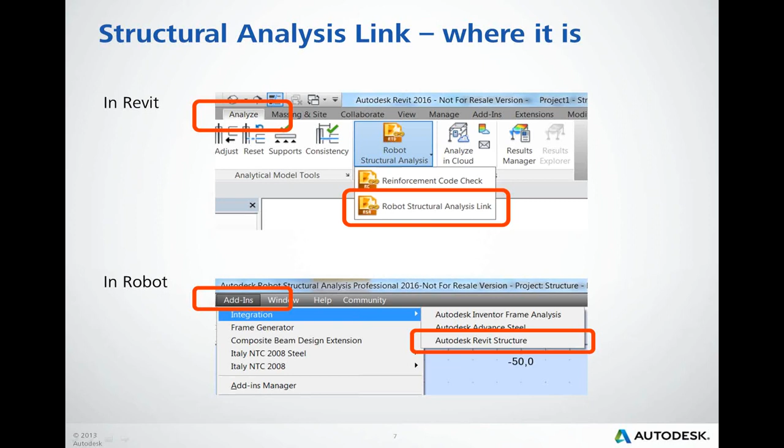There are two methods of model transfer between products. First, direct integration. The link connects both of these programs installed on one computer to exchange the data. That's why it's required to have both of them installed on one computer. Second, by intermediate file. An additional SMXX file is created so the file can be exchanged between users and computers.

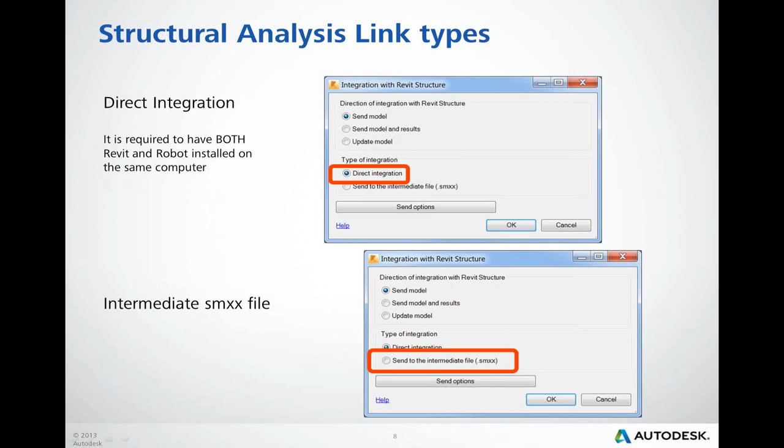Structural analysis link, understanding of the windows. Please select options from the perspective of the program you are currently working in. In general, export means send, and import updates means update in these windows. So, for example, importing a model to Revit is the same action as sending the model from Robot.

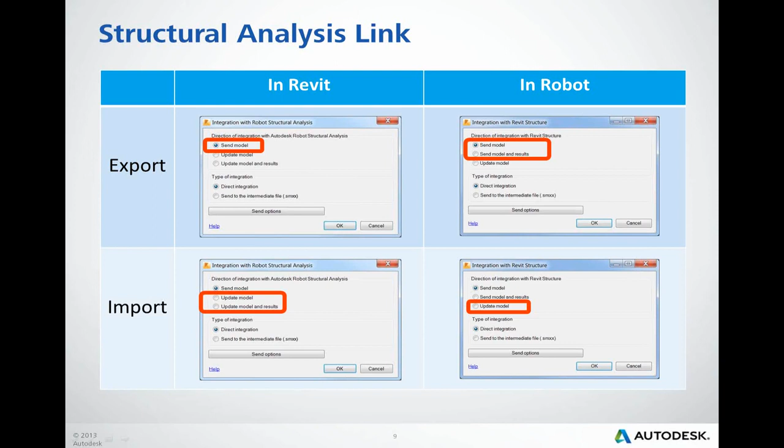Let's look at object transfer between Revit and Robot. Robot is much simpler, it contains only analytical elements, and a Revit model may contain objects from different disciplines such as architecture, structure, MEP, and so on. So let's look at Revit objects. Revit elements which can be exported, created during import from Robot, or updated from Robot are available as structural elements. But additionally, these elements need to have the analytical model enabled. By default, it is enabled for all of them.

Boundary conditions are understood as supports, such as point or nodal support, line, and area support, which can be applied directly to Revit analytical elements. In Revit, they are available in the Analyze tab or during analytical model adjustment, such as analytical nodes and analytical links.

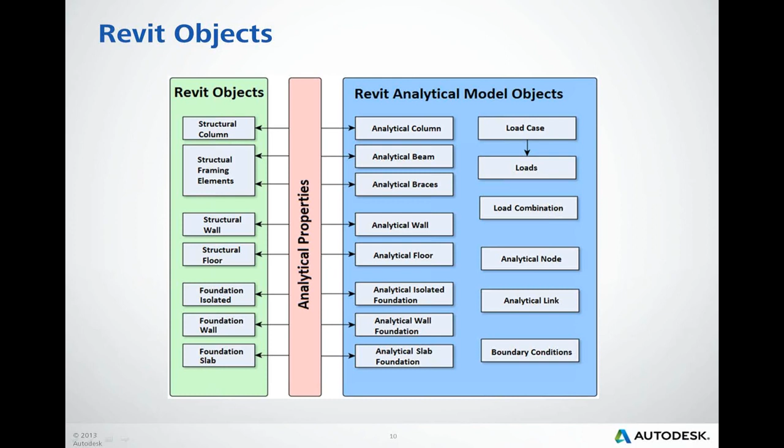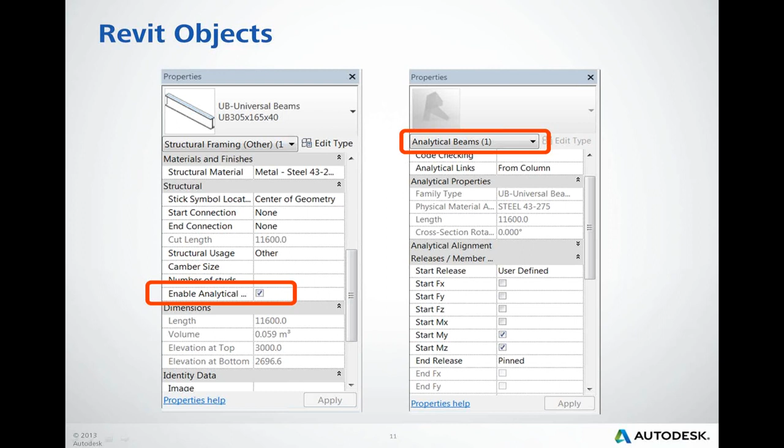The whole analytical model, or a level, section, or elevation view with analytical elements, can be displayed either using predefined analytical views in the structural template or by turning on analytical model categories in the Visibility Graphics window.

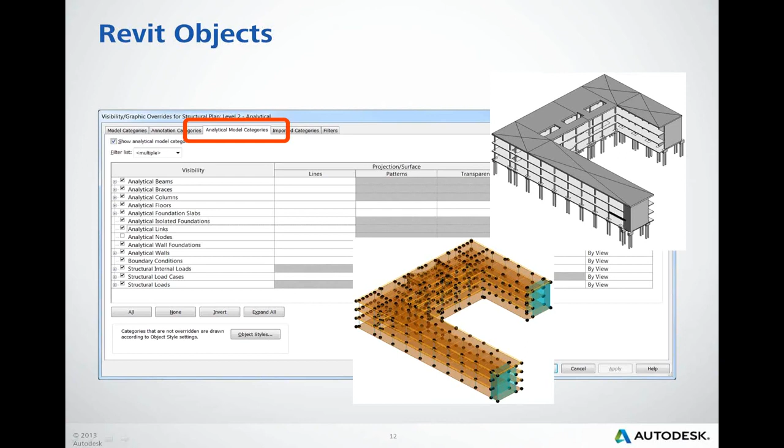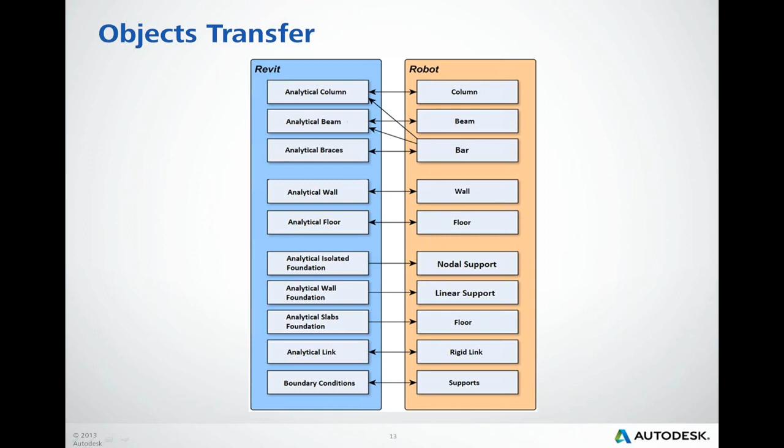On this slide, you can see how objects are transferred between Revit and Robot. Some of these transfers are unidirectional, some bidirectional. Especially look at the bottom part of this picture. Supports modeled in Revit as physical objects are exported only to Robot. Robot supports are transferred as analytical boundary conditions in Revit.

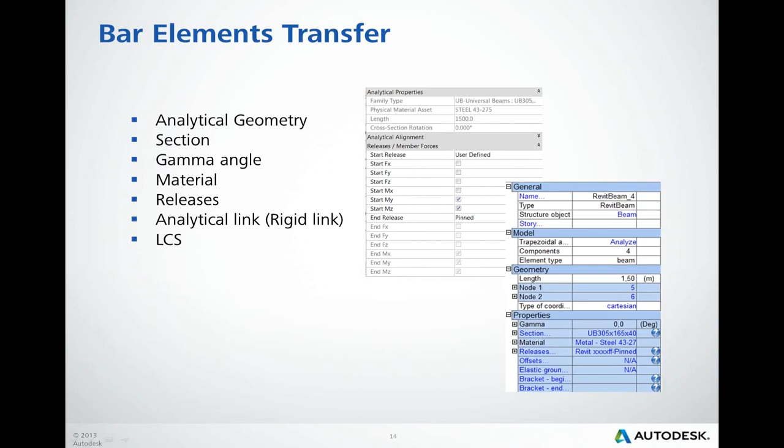Here we can see the list of bar properties exchanged between programs. They are geometry, section, rotation angle, material, releases, rigid links, and the local coordinate system of bars. And now a list of the wall, slab, or floor properties exchanged between the programs, such as geometry, thickness, material, and local coordinate system.

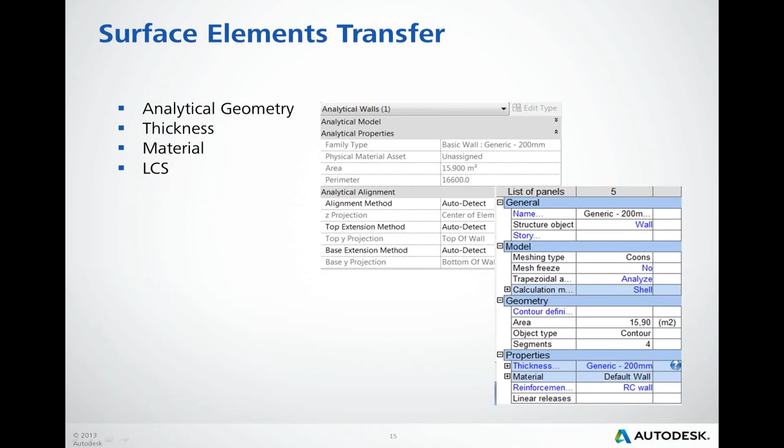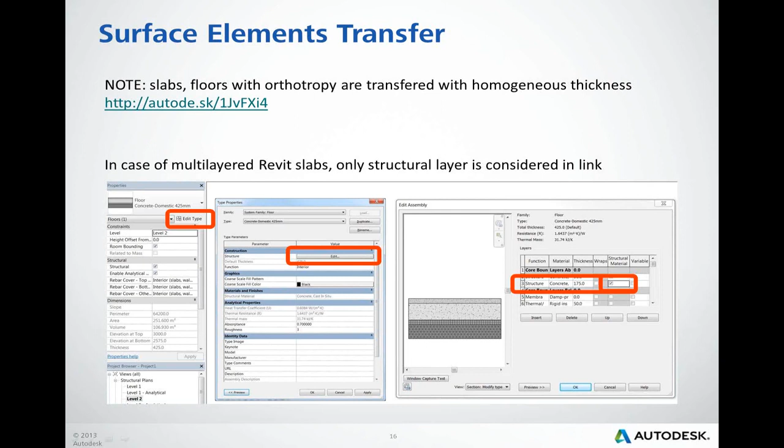The case of Revit materials. Structural analytical Revit objects should have materials with physical assets assigned for calculation purposes.

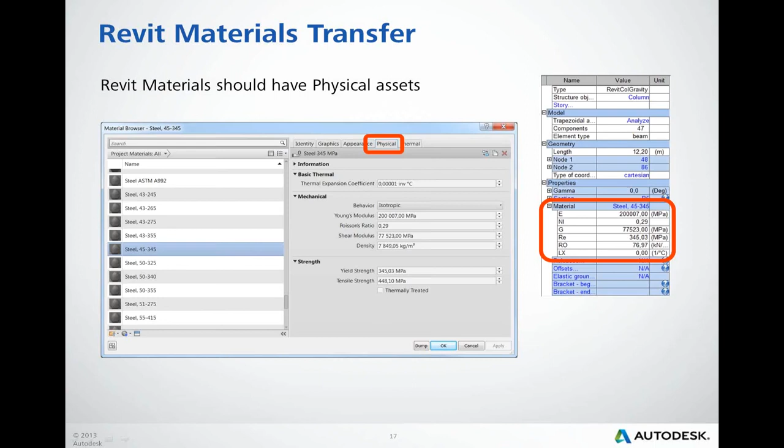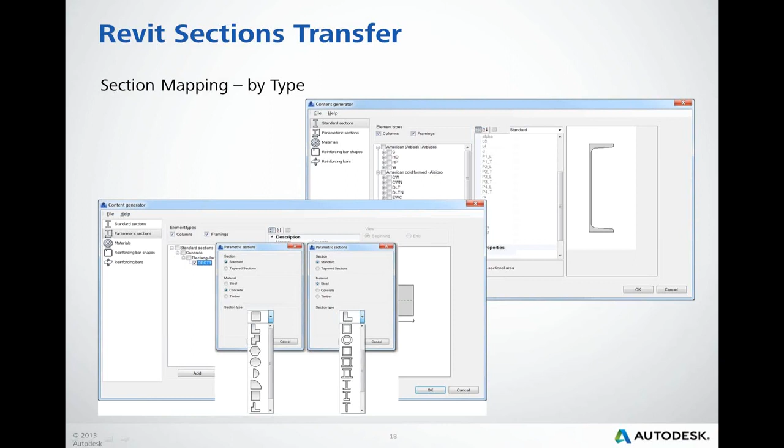Sections. Section shapes can be transferred between Robot and Revit in three ways. First, by type mapping. Standard sections such as steel database sections, Revit standard steel sections, typical concrete sections, and Robot parametric steel sections are automatically mapped to the correct corresponding section in the target program by the Content Generator module. Of course, this process is automatic and not visible to the user.

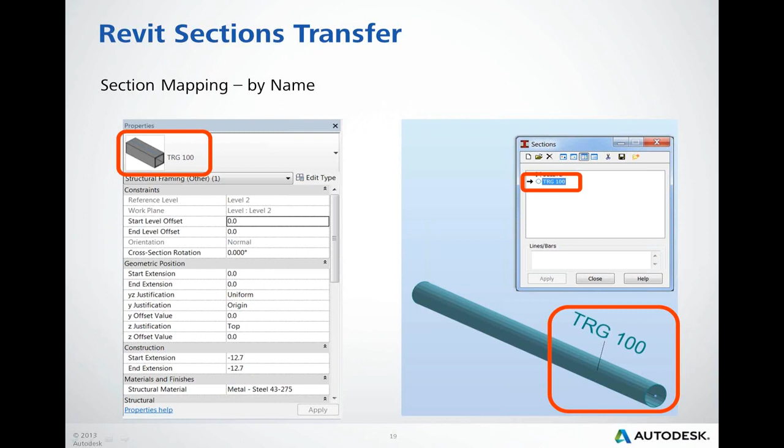If the name is not recognized, the mapping dialog window is opened, and it is possible to assign a section that does not match by name by selecting any available section on the list and in the databases.

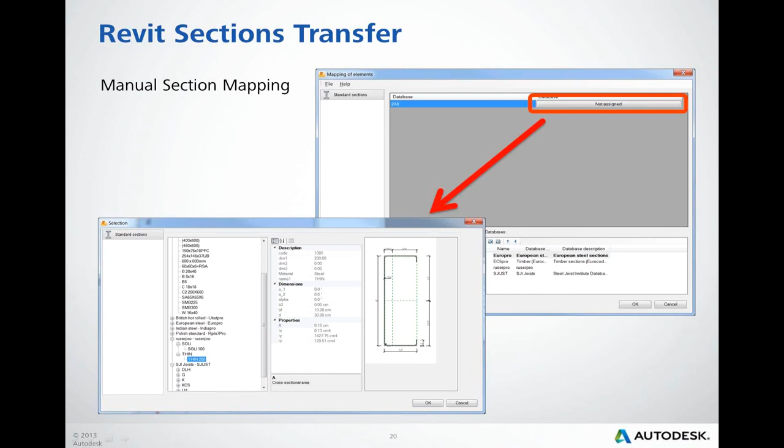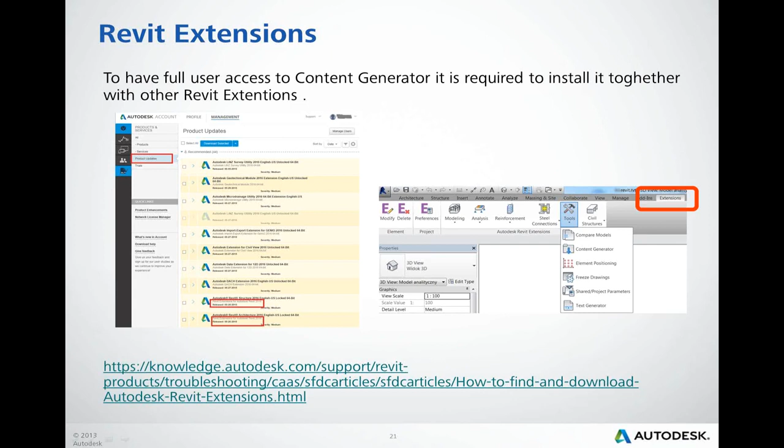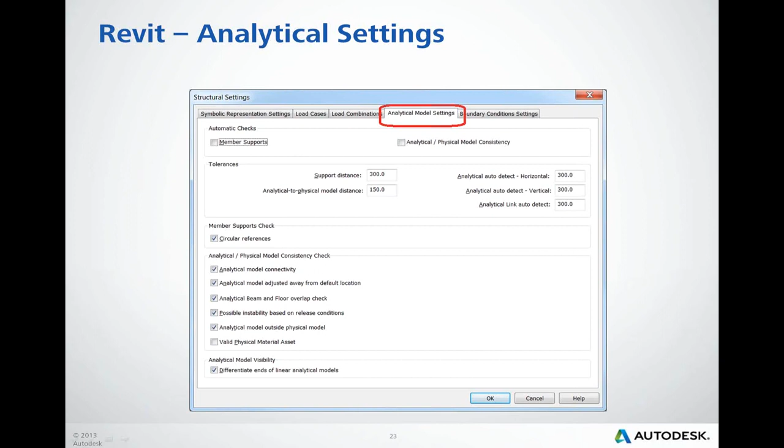There are some analytical model settings in structural settings for automatic adjustment of the analytical model. As you may see, there are some tolerance values, distances between objects, to be merged locally or located correctly in an automatic way. The Revit analytical model can be checked by consistency check. The button is located on the Analyze tab. The report of this check is displayed automatically right after the check or at any time from the Manage tab and the Warnings button.

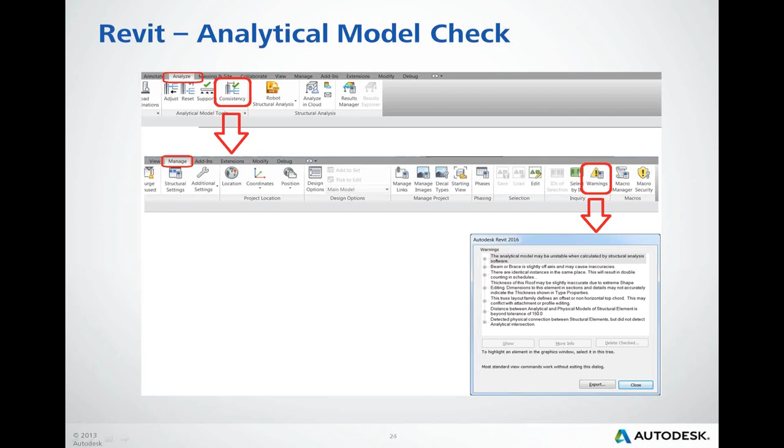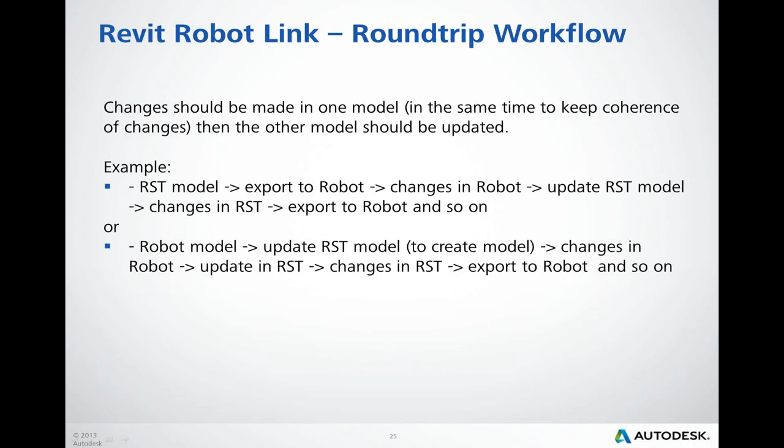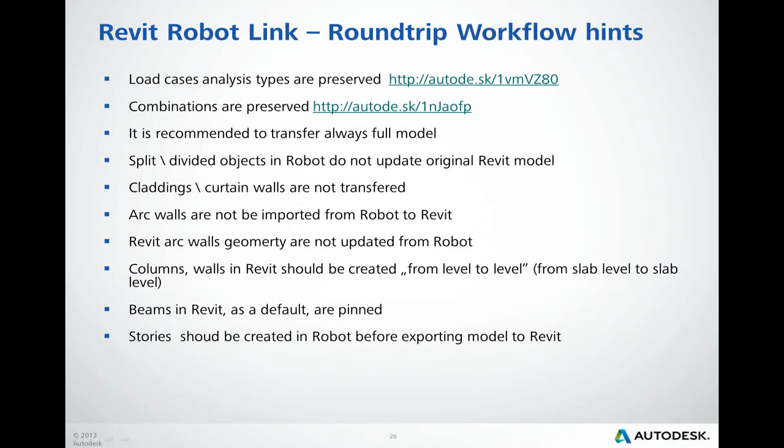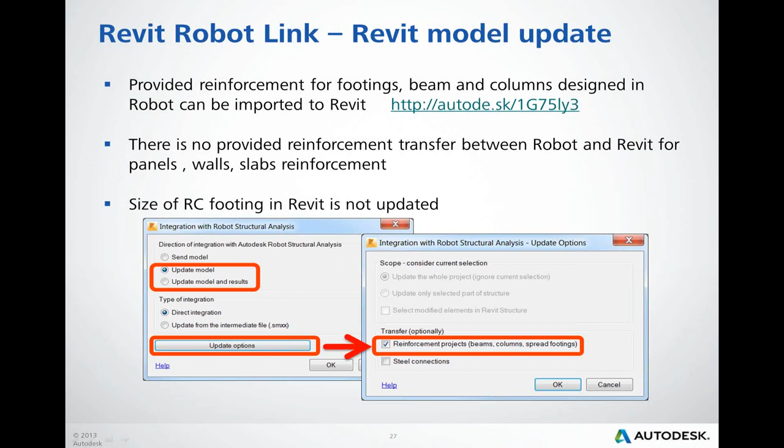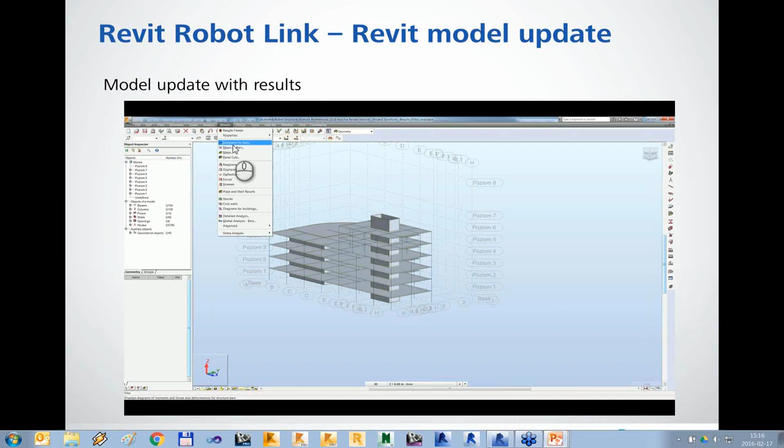Let's look at the example of how to update the Revit model. So as you may see, here we have a Robot model with results calculated. Just for viewing purposes, I will display the MY diagram for bars like that. And this model later on we will import to the corresponding Revit model.

As you may see, on the integration dialog window, I have selected Update Model with Results. On this window, you may see that the program creates packages of the results. On the top part of this window, there is a package name and package set for the finite element results. At the bottom, in case of having required reinforcement results, there will be an additional package for reinforcement results created. In this case, we have only one package for finite element calculations.

So after pressing, the program imports and updates the model with results.

We can manage results using the button called Results Manager, and after opening the window we will see the list of packages. After pressing Explore on this window, or Results Explorer on the ribbon, we can enter the window where we select properties of results to be displayed on the Revit analytical model.

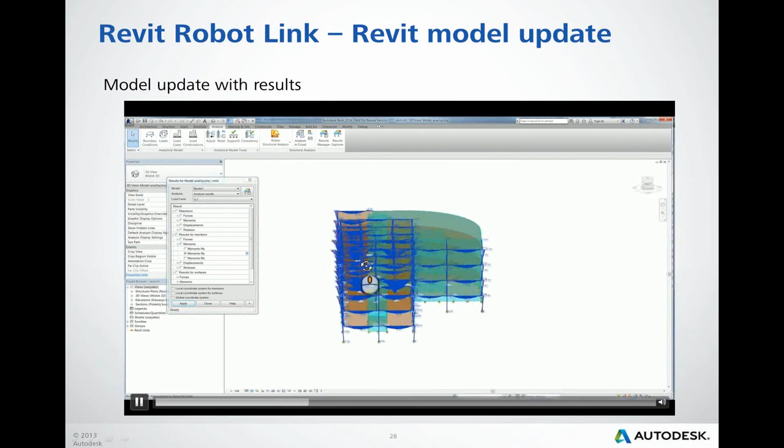We can switch to a different load case. So the same diagram for load case number 1. Additionally, we can display deformation.

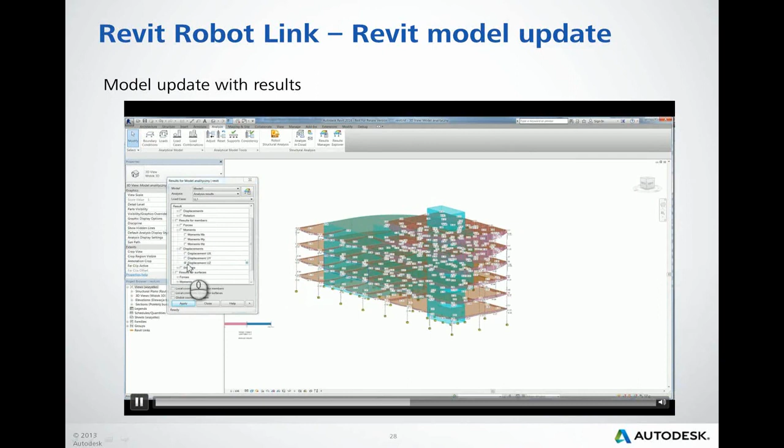Also there is a feature not available in Robot: displacement, which is the deformation in only one direction. So we can see the diagram of deformation in one selected direction.

For slabs, floors, and walls, we can display results maps.

Let's go back to Robot and calculate provided reinforcement. First, we will calculate provided reinforcement for all beams and columns. As you may see in the required reinforcement table, all results are available.

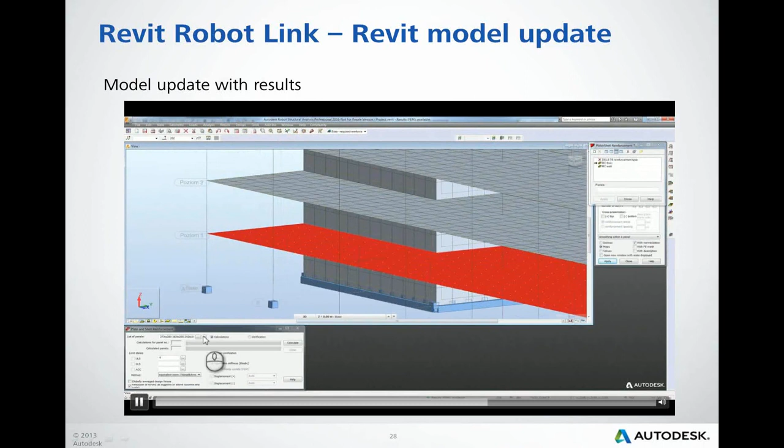Then, just for demo purposes, we will calculate reinforcement for just one slab. After calculations, we can see the map of the reinforcement.

Going to the link once again, we will select updating with results. Now, as you may see, an additional package for required reinforcement is activated, so the program will import this calculated reinforcement from Robot.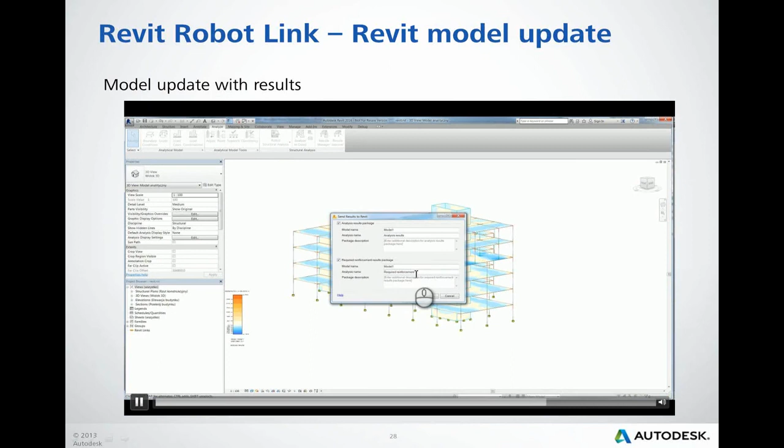As usual, we will go to Results Manager, and as you can see, there are two additional packages imported from Robot: the second run of finite element results, and additionally the package for required reinforcement.

So I will select the required reinforcement package now and explore these results. As you may see on this Results Explorer window, the tree of results is different because we selected a different type of package results, so it's only for required reinforcement.

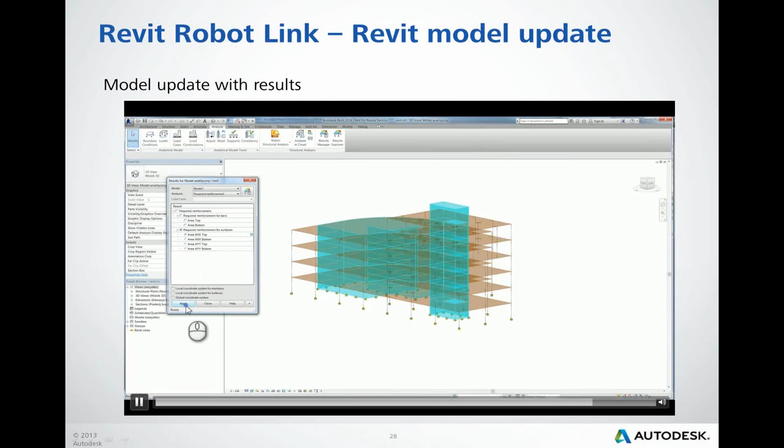After expanding the trees, we can see what we can present: top and bottom maps for slab reinforcement and wall reinforcement. Of course, results are only presented for the one slab we calculated in Robot.

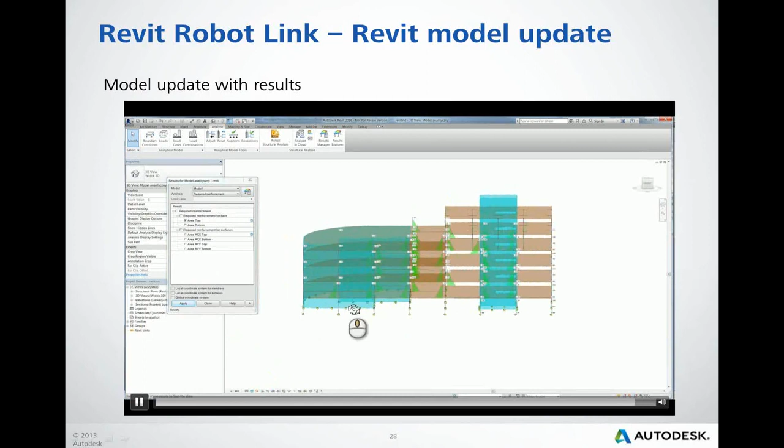And required reinforcement, top required reinforcement results for beams and columns can be presented as diagrams.

Now a few slides on typical Revit analytical model errors. Paying less attention to the analytical model and its accuracy may result in situations like this: beams, bars, and columns not connected to each other. Similar things happen with walls.

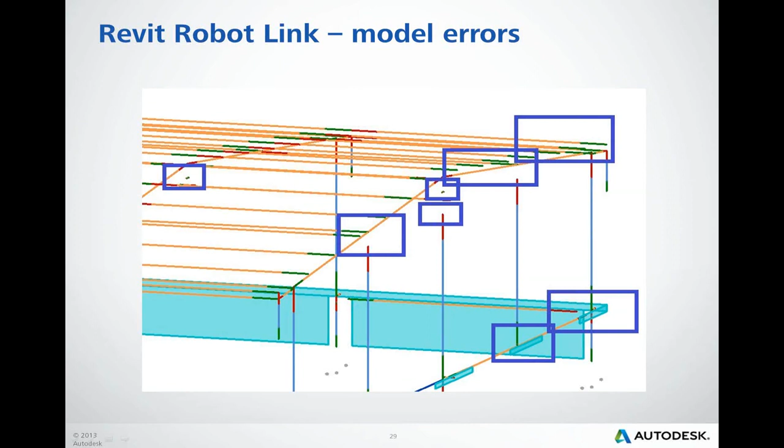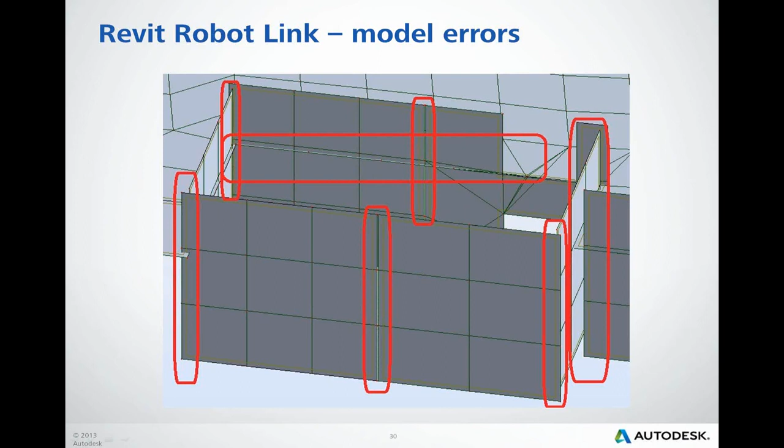Accuracy of Revit walls in Robot, as you may see, walls and slab analytical edges are not lying in the correct planes, so they are crossing other walls rather than meeting them in the proper plane.

Overlapping analytical slab edges, as seen in Robot.

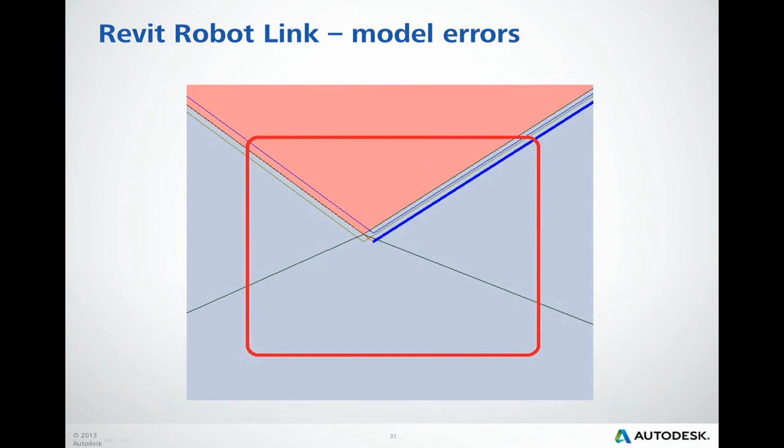For a Robot user, it's quite easy to correct the model. Sometimes it's time consuming, but there are many tools in Robot to do so. In Revit, though, let's look at a few examples of how to correct a Revit analytical model.

First, let's look at correcting walls and columns. As mentioned before, under structural settings there are analytical model settings with tolerances, and these tolerance sizes are understood as the distance between objects, analytical points or lines, to merge them into one and correctly link between objects.

In our case, I will change these values to a smaller one to disjoin this model, which is in the background. But of course, this automatic way may not always work.

That's why I want to show you typical ways of correcting the model. As you may see, these columns are not properly connected. To fix this, after activating the analytical model, we click adjust analytical model.

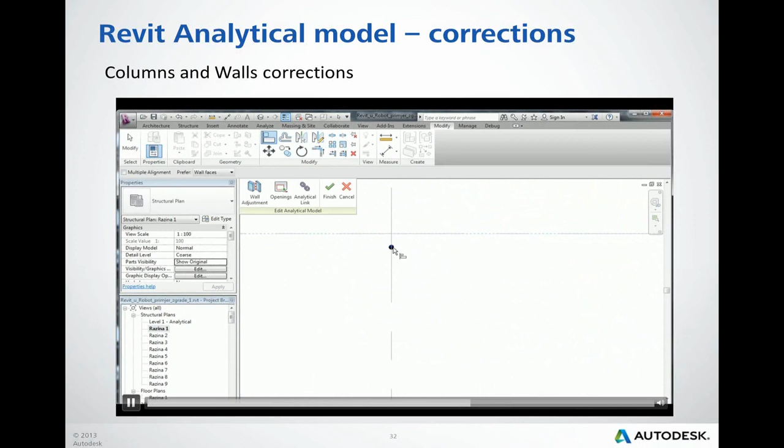In 3D, we can see the column is disjoint, so I will join it using the align method. And now, as you can see, this column became vertical.

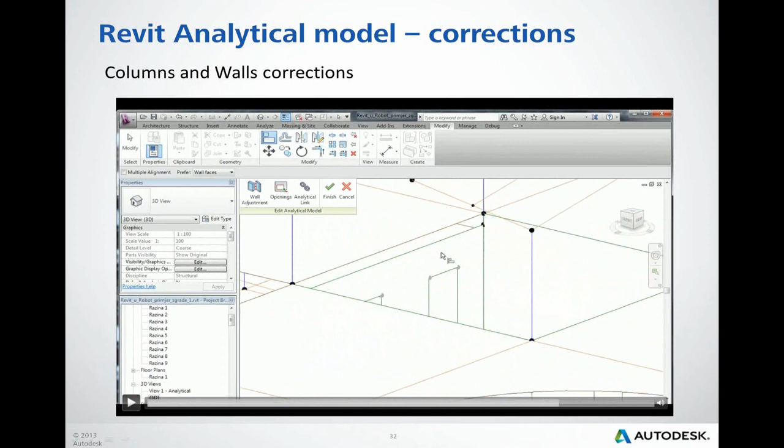Correcting walls: as you may see, this wall is too short. I mean, the analytical representation of this wall is too short. How to correct it? As you may see on the screen, the analytical nodes of the walls are usually presented in gray color, meaning it's not possible to easily move or relocate them, or use the align option on these particular corners or nodes. So for correcting walls, we either have to use the wall adjustment function.

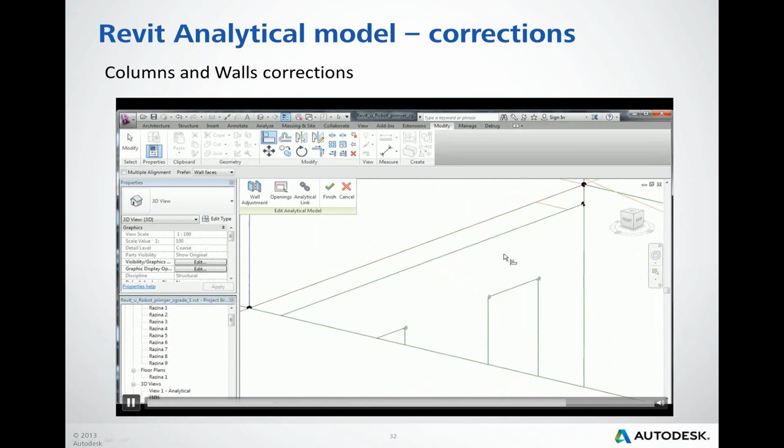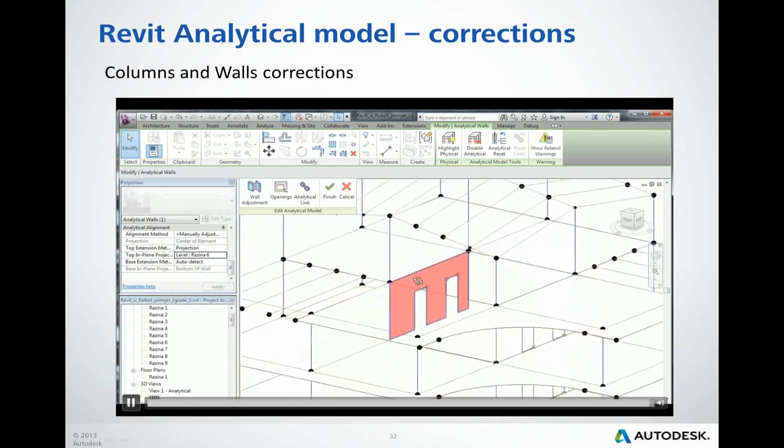This function is shown as a button on the Edit Analytical Model, or we have to use different kinds of projections to properly move the edges of the wall or planes of the analytical wall. Because align does not work here, after selecting the analytical wall we have to go to the properties window, the Revit properties window, and in the analytical alignment section, turn off auto-detect for different kinds of adjustments. Then select, for example, projection, and select the correct level or reference plane, and the wall will be properly adjusted.

Now you can see a simple model with a slab and an opening. How to manage that? From the 3D representation of this model, everything seems to be fine.

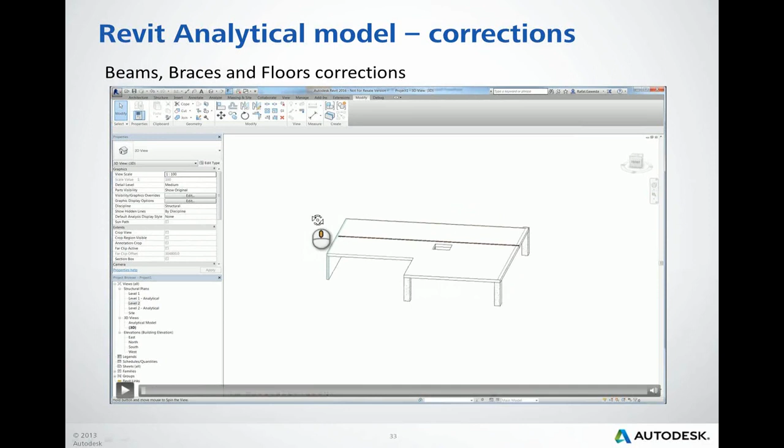Editing the boundary of the slab also allows us to change the slab opening geometry. The real opening geometry also forces the program to change the analytical model opening geometry. So after switching off the model display and turning on the analytical model display, we can see the view of our analytical model. As you may see, the opening is adjusted to the boundary lines created by the real slab floor object.

Of course, there are some errors made on this model on purpose for our demo. For example, the analytical edges of the slab are out of the correct lines or faces in Revit. To adjust it, we have to highlight or select the analytical model and go to adjust. As usual, we will use the align option to align edges to lines, grid lines, or other reference planes. Here is the way of correcting the position of analytical nodes.

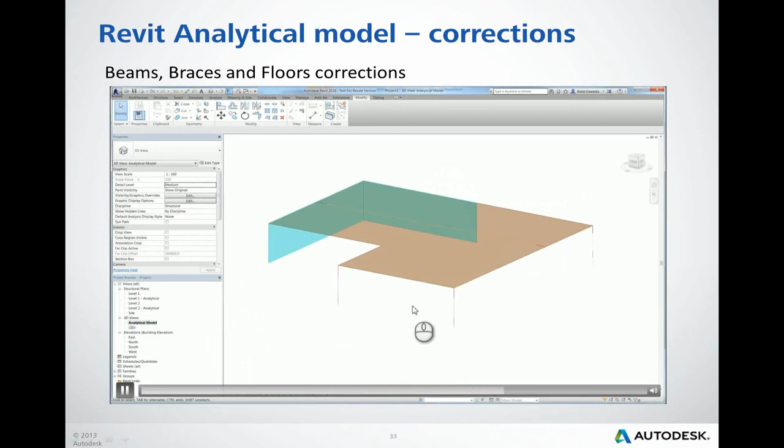As shown previously, the geometry of the opening is taken into account from the boundary conditions, the boundary lines of the real slab geometry, but disabling or enabling can be activated in the analytical adjust. As you may see now, the opening is disabled in analytical mode, but we can still see it in the real model.

Once again, adjustment of the boundaries, boundary lines or boundary points of the slabs. As mentioned before, clicking on the analytical node, the black dot, lets us freely move it. The same applies to the midpoint of every edge.

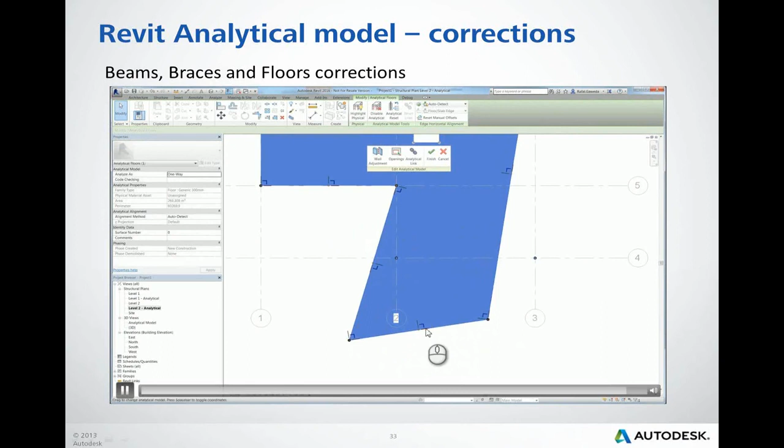Now, clicking on one direction axis, in this case the perpendicular axis to this indicated edge, allows us to move only along this selected direction. Now I will click on the second direction, and it only allows me to move the whole edge in that direction.

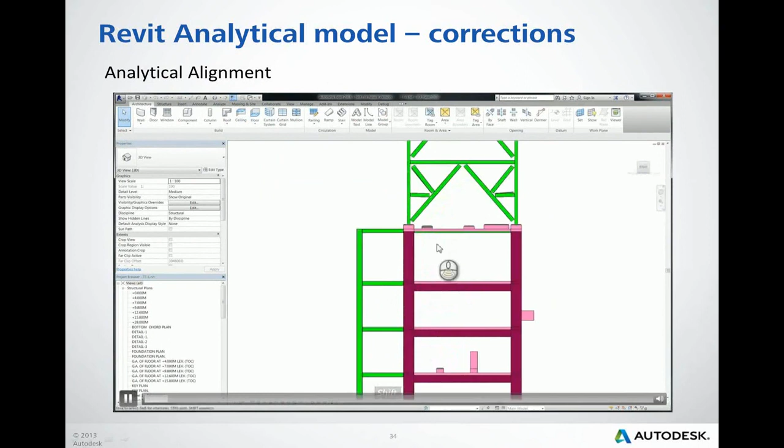There is another example with the structure, bar structure, this small tower. From 3D geometry point of view, it looks nice. As you may see on this view, almost perfectly as Robot can present it.

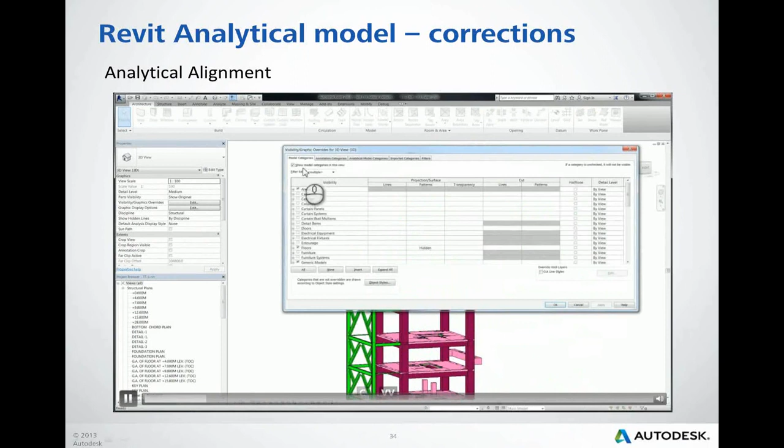But in details, the analytical model - turning off the real model and turning on the analytical model - is imprecise. As you may see, the rafters, roof rafters, are above the roof slope. Also, the bottom chord of these trusses are not properly located over the elements, over the columns. Not everything is located in one plane. And also later on you may see that the bracings are not located properly.

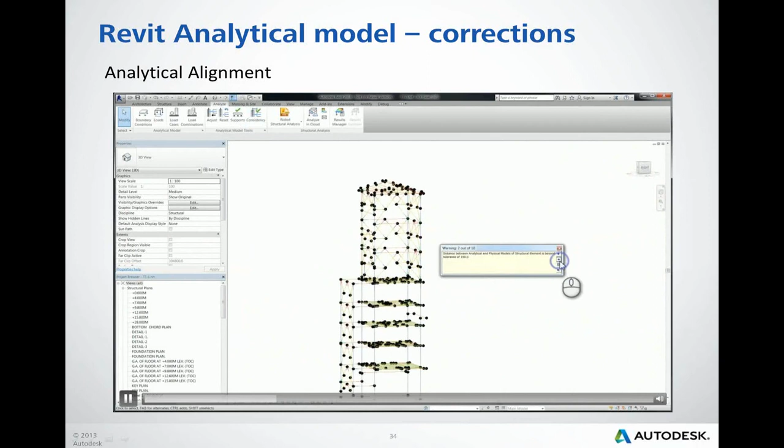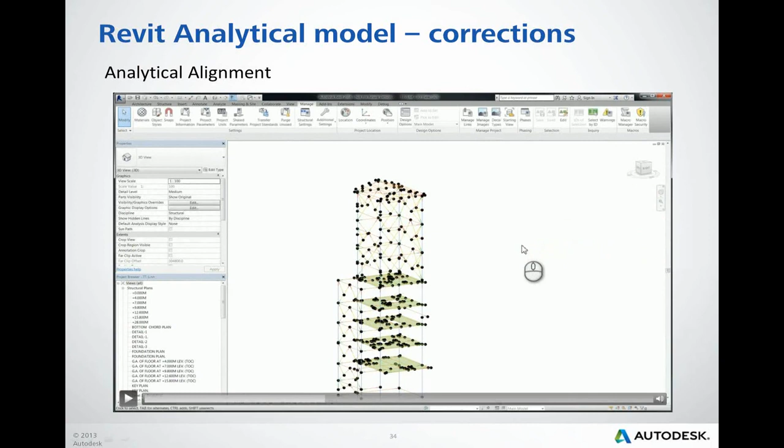To correct it, first of all, we can use the consistency check to see, not all but many, errors if they are in the Revit model. If possible, after clicking on each item in this window, the program should highlight or display it in different color, elements with the problems. It's not seen for now, but some of these nodes should be highlighted into light gray color. But we can see now this model.

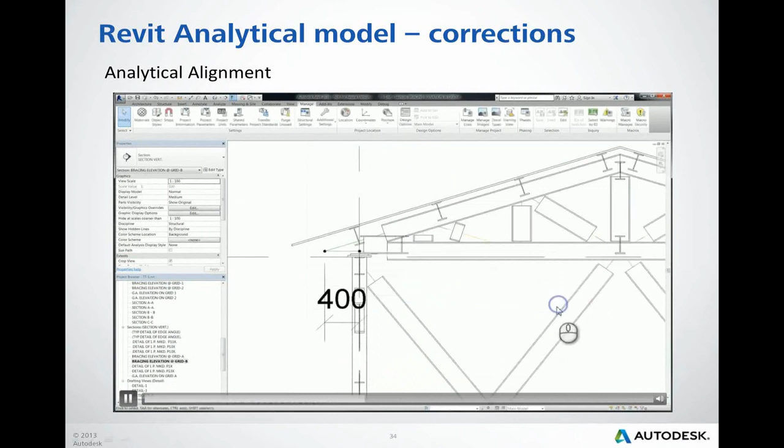So I will show you how to correct first the roof of this tower. On the elevation view, I will turn on display of analytical model. So the green analytical line of top chord will be my reference, let's say reference plane, and I will adjust the beams location to this plane. But of course, it's needed to create this plane.

I will create the reference plane by selecting this object and extend it a little for selecting it easily later. What's important, after creating reference planes, is that it's good habit to name it, especially if you want to use it in different kinds of selections for projections, because the selection projections are based on the names of the axis, grid lines, and also on names of reference planes. So it's important, if you want to use it for projections, to name such reference planes.

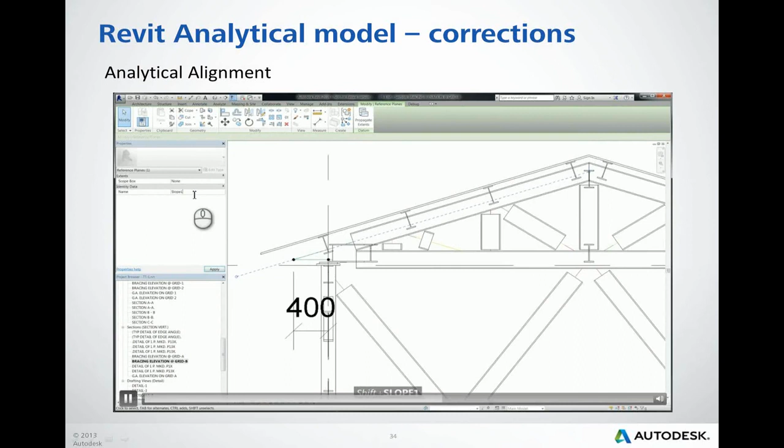So the name will be Slope 1, and then after selecting analytical beams on this slope, and then going to the properties window, we can start to use the alignment, analytical alignment part of this window, and switch off or change automatic detection of the planes into manual projections. As you may see, I'm starting changing the location of this projection onto the reference plane I created of the name Slope 1. And now, as you may see, the beams locations are adjusted.

Another typical way of correcting beams is by aligning nodes. But of course, it's only possible to align nodes or anything in Revit one by one, so it's hard to make multiple corrections in one run.

Afterwards, after correcting the model and also creating the second slope, you may see now that the roof part seems to be made correctly from the analytical point of view. And as you may see with this big zoom, the analytical representation of some bracing in the wall, let's say wall planes, is not accurate enough, so the bars are not meeting it. So as usual, we can use the align option just to merge them.

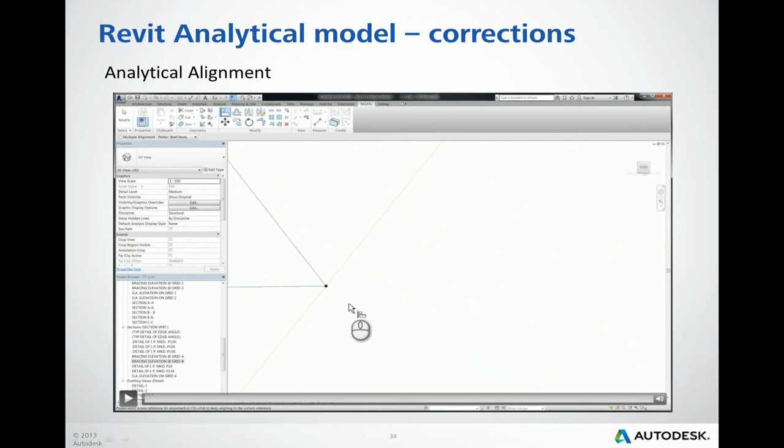Analytical model also can be corrected after importing in Robot. It's much easier sometimes, especially for an experienced Robot user. In order to correct the model having some issues with inaccuracies, we recommend running first the detailed correct option, selecting structure axis. So selecting the structural axis option on the detailed correction window.

If it's needed, it's also recommended to add some structural axis in Robot to make this process as automatic as possible. In other cases, detailed correction options can be run with different settings and different parameters, like correcting to plane, correcting to line, or correcting to nodes or points.

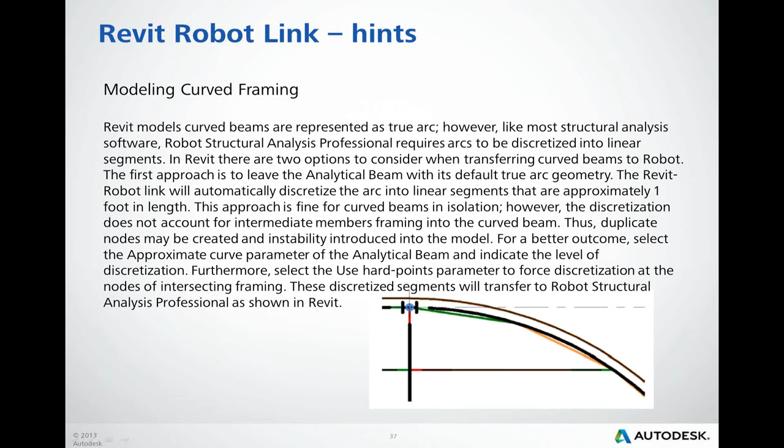In Revit, there are two options to consider when transferring curved beams to Robot. The first approach is to leave the analytical beam with its default arc geometry. The Revit Robot link will automatically discretize the arc into linear segments that are approximately 1 foot in length. For a better outcome, select an approximate curve parameter of the analytical beam and indicate the level of discretization.

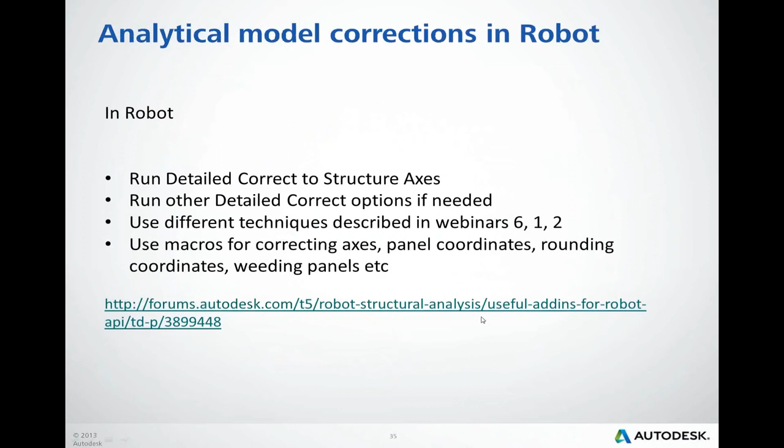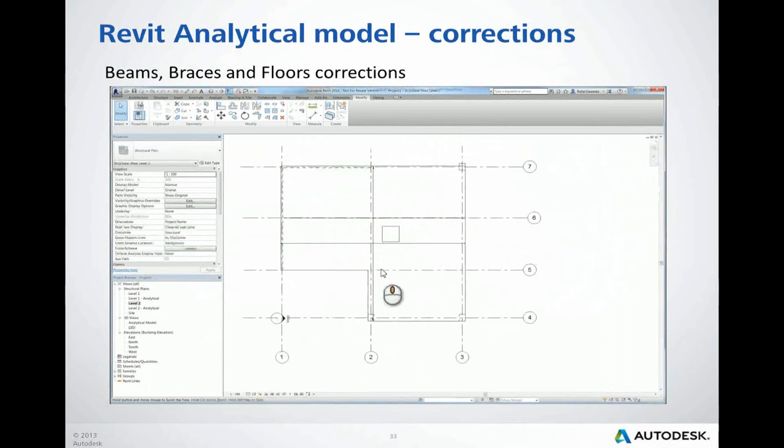And there was also a question about the possibility of changing the boundary of the analytical model of the opening, which I believe has been shown. But can we see that again? Yes. So let's switch to this video. The opening geometry can only be adjusted by modification of the slab boundary elements. Oops, I'm very sorry, once again.

So, of course, this approach is correct in case of creating the boundary by the boundary lines. In case of creating the whole geometry with the boundary lines, one is able to change the opening geometry by moving or adjusting the boundary geometry.

But in case of creating openings by shafts, and the same concerns the wall openings, they are created by shafts. The shaft geometry should be changed to reflect this change in the Revit model geometry, the real geometry of the slabs, and also the analytical slab geometry of the opening.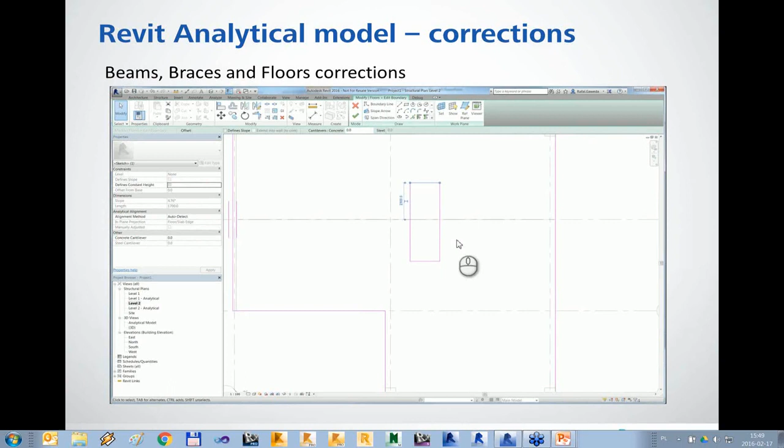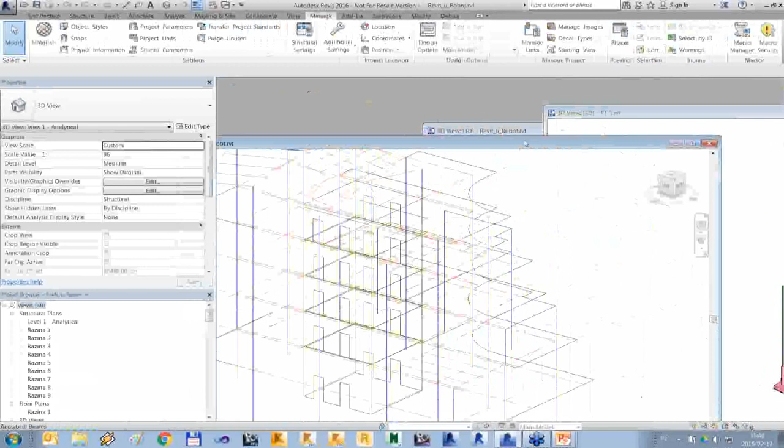So there is a question about the foundation in Revit, and how should we input the supports to have it in Robot, elastic or for foundation. As a default, let's look at the model. Okay. So here's the model like that, and this is the representation of analytical supports.

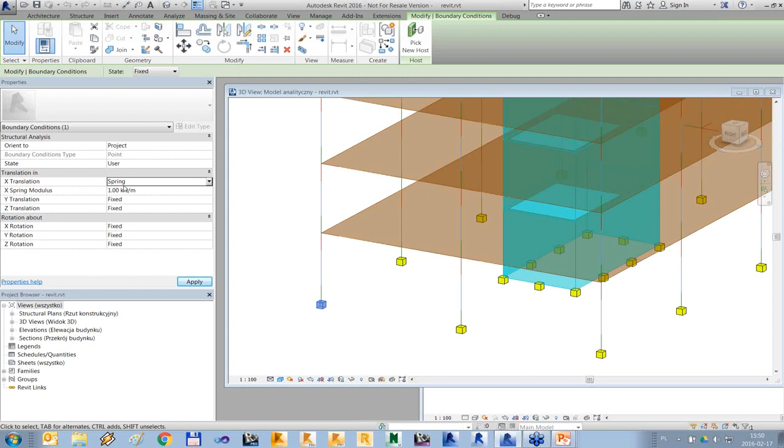And if you click on an analytical support, you will see boundary conditions, and you may switch to user, then select release direction or spring, and type the spring modulus values here, and it should be considered while exporting. So you can create your own support with fixed or released directions, or a spring support, and it will be considered during transfer. As a default, if you apply to the model, let's look at the 3D view. Okay.

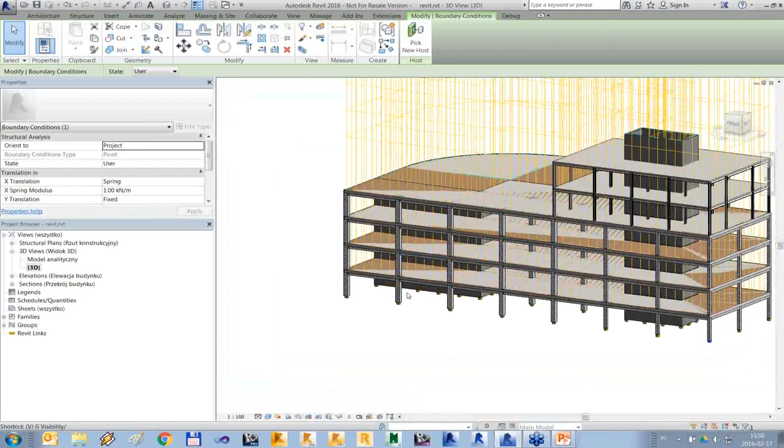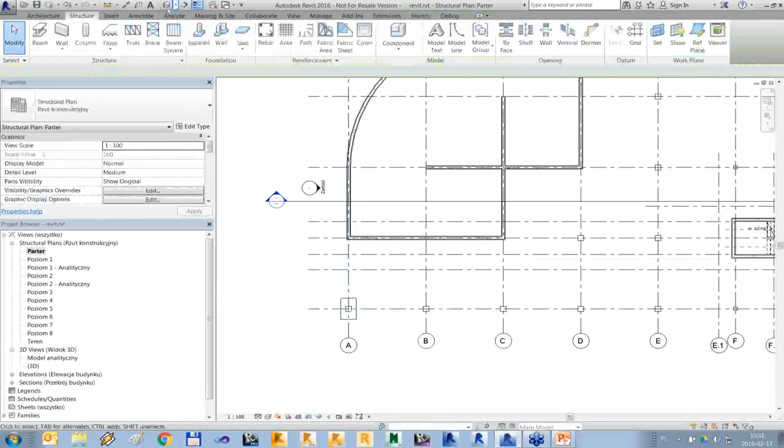So I will turn off the whole analytical model now. So if we apply, let's say, a standard isolated footing, in such a way the footing, even without assigning this analytical support, also has an analytical foundation representation, and you may find it here, and as a default it's considered as a fully fixed support.

So either playing with the analytical support, you can select different degrees of freedom to be free or fixed, and also add elastic coefficients, or in case of using standard 3D model objects, you may see their settings in the properties window, as a default fixed.

There is a question about adjusting the analytical model of the sloped slab, but to a slope not parallel to this slab. I have never tried it, but I guess it is possible. But as shown in this example with this floor correction, you have to create a reference plane and make a projection to this reference plane. So this reference plane can be created, let's say, above or below the correct slab slope, and it should work. But for now I'm not sure because I haven't tried it, but I guess it should work in this way.